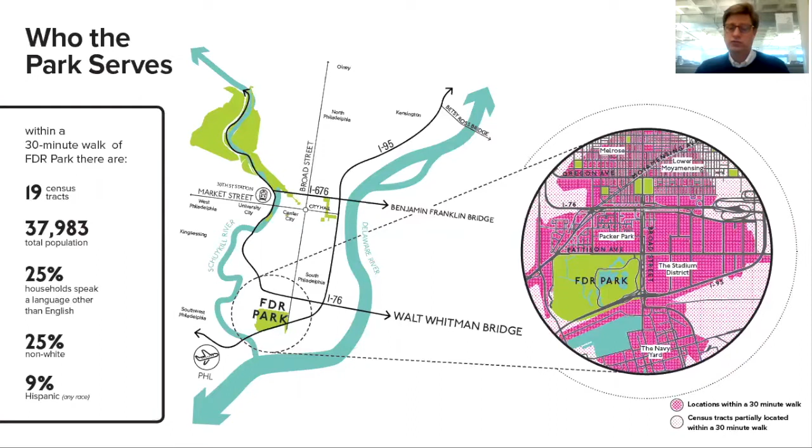Until the turn of the 20th century, these tidal marshes were largely undeveloped. Hollander Creek and Shedbrook Creek bisected the site and flowed into the back channel of the Delaware River, now the Naval Reserve Basin. It took vast quantities of fill generated by the construction of the Broad Street subway lines, and the 150th anniversary of the signing of the Declaration of Independence, to spur city leaders to hire the Olmsted brothers, Frederick Law Olmsted's sons, to create a formal plan for League Island Park in 1914.

The brothers' plan carefully separated the park from the city by depressing the network of lakes, carriage paths, and greenswards into a bowl, bisected by the extension of Broad Street. By 1926, the portion of the park east of Broad Street was absorbed into Municipal Stadium, which has grown into the Stadium District today.

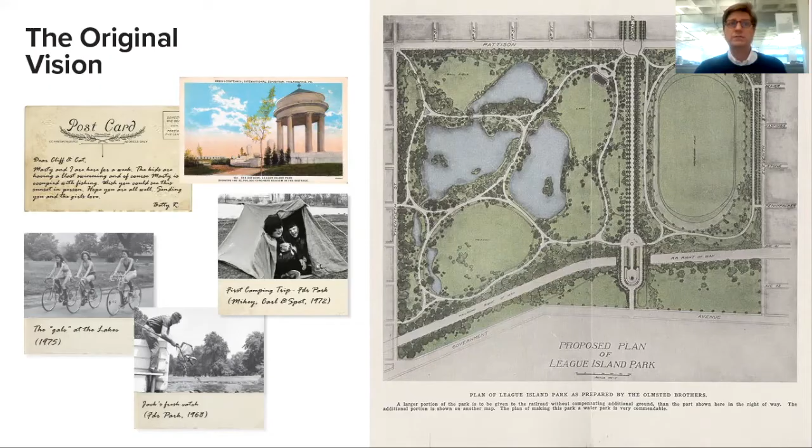The next significant change to the park came in the 1940s, when 180 acres were added to the west, creating a municipal golf course. This investment reflected the recreational priorities of the city leadership at that time. In the 1960s, the southern portion of the park was lost to the construction of Interstate I-95.

The practice of making ad hoc changes to the park has only increased. In the 1970s, the site received fill from the construction of wastewater treatment plants. These shifting boundaries are evidence of the way FDR Park is viewed less as a network of systems and a platform for recreation, and more as a green void on the city's map, ready to absorb development schemes, infrastructure projects, or pet projects of well-connected individuals.

Happily, many of the projects that have come to fruition at FDR Park were driven and led by a community of users. The famous skate park was built by hand in the 1990s. One of the region's best Asian markets draws visitors from New York to Maryland on summer Sundays. Ensuring that the park holds space for immigrants and Black communities, along with generations of Philadelphians who know this park from tailgating at football games, needed to be a priority of the master planning process.

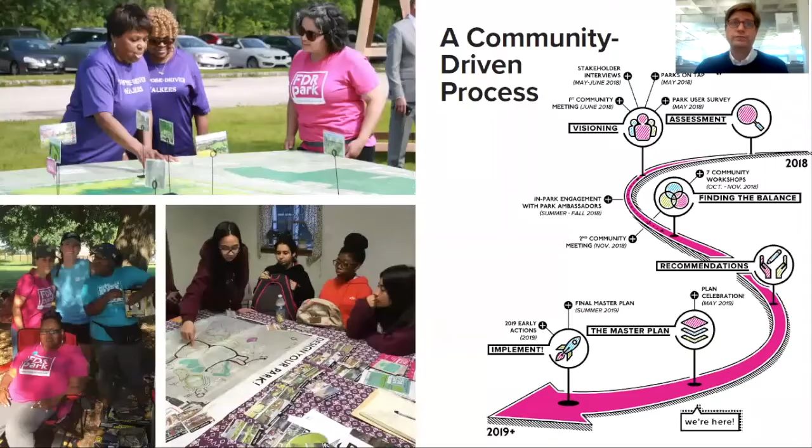The boundaries of FDR Park have continually shifted to reflect the political priorities of the moment. Our planning process needed to firmly center residents in the conversation about the park's future. During the year-long planning process, the project team engaged over 3,000 community members and stakeholders, with FDR Park being one of the most heavily used parks in Philadelphia.

The master plan process was structured to ensure that all park users and communities were invited and had the chance to weigh in on the future of the park. Yet, in order to deliver a vision for the park that has a viable pathway to implementation, the planning effort must leverage the reality that FDR Park sits at the confluence of major initiatives affecting the city's future. It was essential to be deeply engaged with the leaders of these initiatives beyond the Parks and Recreation Department.

For example, the Pennsylvania Department of Transportation was critical to understanding how the future reconstruction of I-95 can repair damages from the 1960s, such as stormwater that greatly impacts the park today. The Philadelphia Water Department's Green City Clean Water program points towards in-park projects that may help meet Philadelphia's consent decree while improving water quality in the park. The plan needed to have a strong constituency of support across all agencies.

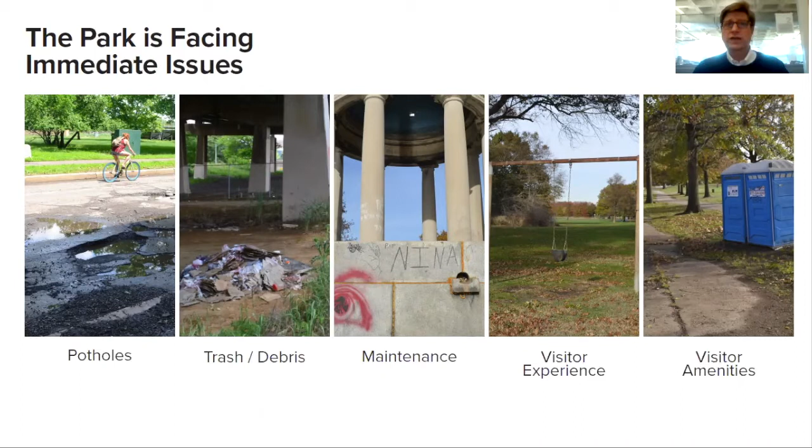So people come for one activity and then leave when that activity is over. There's not a lot of cross usage between the different users, although there are a lot of diverse users and diverse uses in the park. The park has not had full-time dedicated maintenance staff, which you can imagine is quite a challenge for a park of 348 acres in size, until they hired that park manager in 2019.

Some of the long-term challenges that affect the park—certainly water quality is a key one, and I'll talk about the hydrology of the park in a minute. The water features, including Edgewood Lake, the large iconic water feature seen in many photos, were originally designed as a shallow concrete-lined pool with areas for swimming. Those water bodies are now full of sediment, largely related to the amount of untreated storm water coming into the park, and even more shallow and subject to algae blooms.

We have areas of flooding, especially in areas of high use, like the park's only playground near Meadow Lake, and some of the low-lying athletic fields we have in the park right now. The golf course has historically had flooding problems since its construction in the 1940s. There's flooding near the baseball fields as well. So water is a critical component of the future of the park.

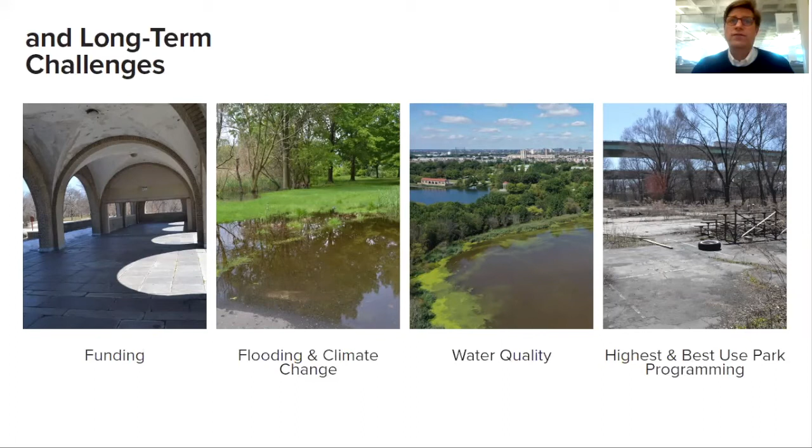FDR Park is very much a park built on and around water, so understanding the park's hydrology is critical in order to achieve an effective planning process. The park was originally tidal marshes that were filled in at the beginning of colonial times, but then continued through the 1900s with the construction of the park and eventually the golf course.

You can see on the left the original Shedbrook Creek running through the park and down through a sluice gate and ultimately out through a culvert that goes underneath I-95 through Hollander Creek culvert and through a tide gate into the naval basin, which ultimately connects to the Delaware River.

On the right, when the park was designed, several lakes were created from the original Hollander Creek, including the Edgewood Lake that I mentioned a minute ago and the Meadow Lake, as well as the Pattison Lagoon to the north. They come together and exit through that same tide gate. So the whole park really kind of comes together in the shape of a Y, and all that storm drainage exits out through the tide gate.

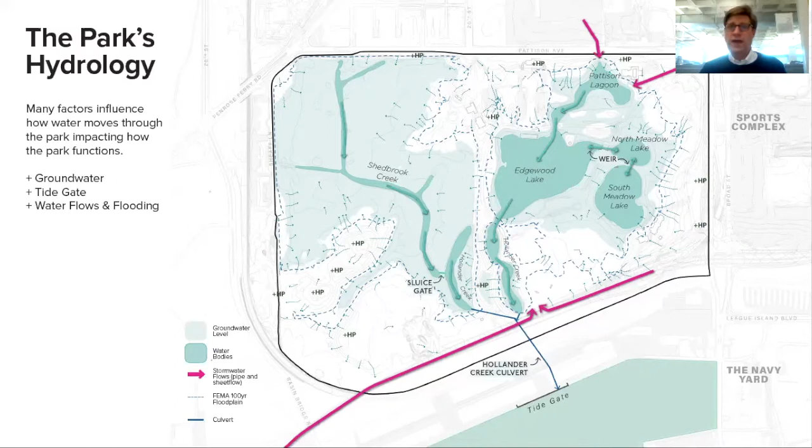But here's where it gets really complicated, because much of the park is actually located below sea level, as we can see on the next slide. So why does this park flood? Well, when it rains and the park receives a lot of runoff from upstream areas, as well as I-95, all that runoff comes into the ponds and streams and the creeks that I just mentioned, but the park itself is depressed and lower than the water level at high tide.

To further complicate things, the tide gate is not functioning well, and it doesn't close well because a lot of trash and sediment is blocking the flap gate. And so there's also issues of water coming in the other direction from the naval basin and the river into the culvert and backing up into the park. So this entire system is in need of repair. We also know that shallow groundwater in the park is connected to and influenced by the river, so that even without the tidal influence, we can get flooding just from the groundwater as well.

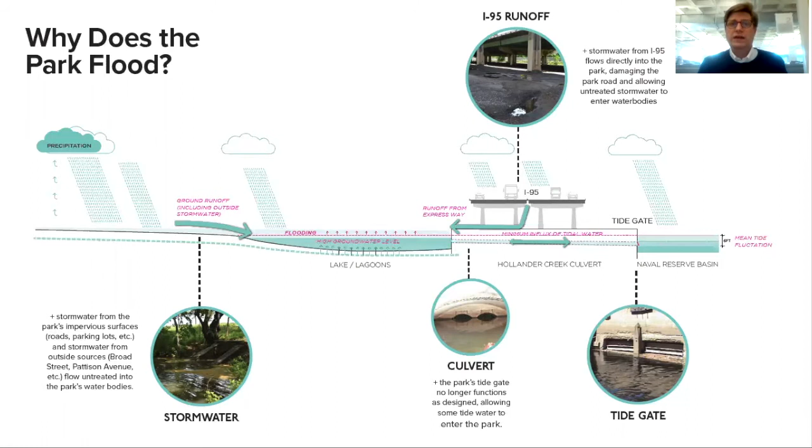As you can imagine, climate change only increases the water challenges the park faces. One of the things worth pointing out is some of the unintended consequences the park will face with climate change. As an example, in New York City, which is only about 100 miles north of Philadelphia, after Hurricane Sandy, Central Park lost over 1,000 trees due to the impacts of salt spray.

We know we will have higher water levels, as much as 2 feet in FDR by 2050 and maybe 4 feet by the end of the century, as well as greater storm surges. So the challenges of getting water out through the tide gate only increase. With the increased CO2 levels, we know that this will help the forest and the vegetation grow, but it'll also increase the growth of invasive species, which already plague the park.

However, despite all these challenges, both current and future, there are also incredible opportunities and resources in the park, including the existing ecology. You can see from this figure the diversity of species you might encounter on a hike in the park, and some of the habitat that we're actually trying to design in the park to increase the amount of species that are currently there.

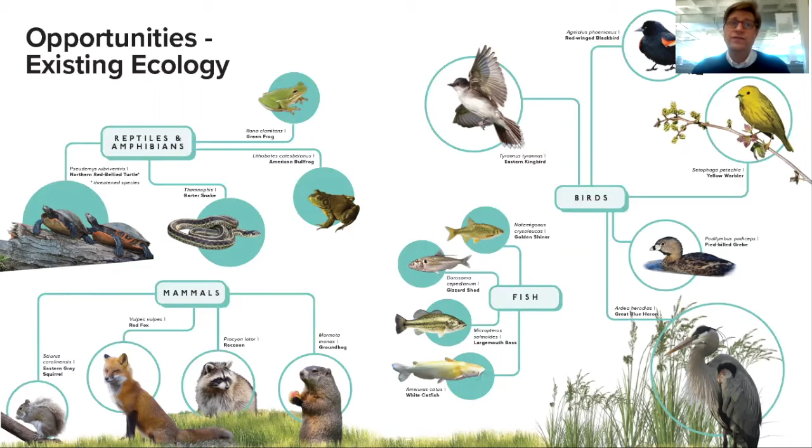FDR Park is an important bird area, as I mentioned at the beginning, as designated by the Audubon Society, with over 195 different species of birds that have been observed either living or migrating through the park. There is a variety of plants and animals, including 2 endangered species of plants and endangered animals such as the red-bellied turtle. It's an important place for wildlife observation, for fishing, for walking, and being in nature.

So when we were developing goals for the master plan, we knew that the park users would come to know FDR Park as Philadelphia's centerpiece of recreation, art, ecology, and resilient design. In order to achieve this vision, the master plan focused on 3 goals: reclaim the vision, restore the function, and renew the impact of the park. The master plan reclaims the original vision of the park for a modern audience by working within the original framework and design intent of the Olmsted brothers.

To restore the function of the park, the master plan leverages nature-based solutions such that the entire park can fulfill its promise as a critical piece of civic, public health, and ecological infrastructure. The master plan is driven by the knowledge that strategic investments in our civic assets can connect people of all backgrounds, cultivate trust, and counter the trends of social and economic fragmentation in cities and neighborhoods.

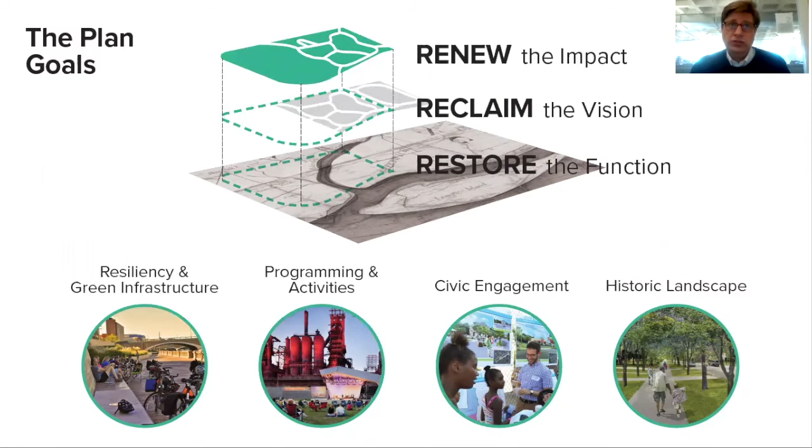To achieve these goals, the design team embarked on an urban ecological methodology called creative fitting. And simply stated, this methodology matches users' needs with environmental opportunities. Now, the measure of a successful creative approach is fitness, which is measured by the health and resiliency of the project's network of social, environmental, and economic benefits, which I'll discuss in just a few minutes.

The FDR Park Master Plan brings nature, water, and human activity into balance in one unified system. Another way to define this is how we can find the balance between all the different competing interests in the park. Every square inch of the park is precious, and the list of programming needs determined through the community engagement process with the priorities that I mentioned before exceeded the amount of park space we had to work with. So we had to be creative in fitting together all the park programming so that they could all be mutually beneficial.

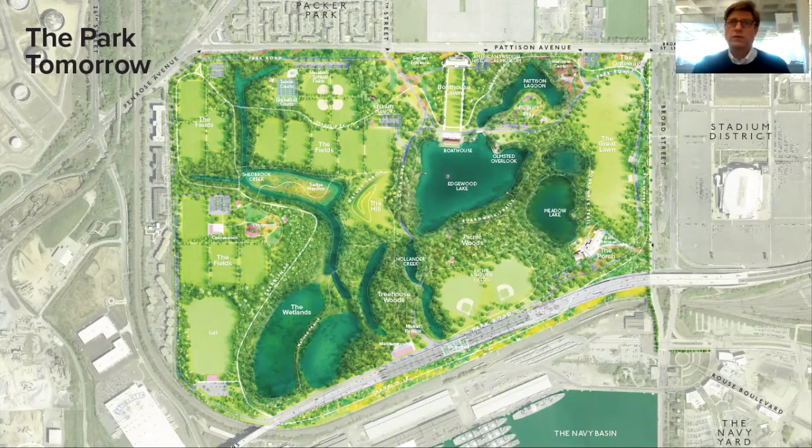Now, the master plan vision reflects a network of watercourses enclosed by swaths of reforestation, encircled by a network of trail systems and tree-lined parkways, framed by fields of active recreation. Playgrounds, restrooms, picnic pavilions, overlooks, and concessions are systematically distributed throughout the park to enhance the visitor experience. Enhanced gateways, expanded event lawns, and increased programming activate the fields at the park's edge, while restored lakes, creeks, wetlands, and riparian reforestation provide an immersive nature experience with enhanced habitat connectivity at the park's ecological core, which you can see in this diagram here in the green, the middle portion of the park.

So this ecological core contains some of the most iconic elements of the park, which are also the areas that are most susceptible to flood risk. The master plan recognizes this risk by increasing the park's capacity to manage water while simultaneously providing opportunities for the park users to connect with nature. Expanding the natural systems at the heart of the park improves the ecosystem services that the park offers to all the park users.

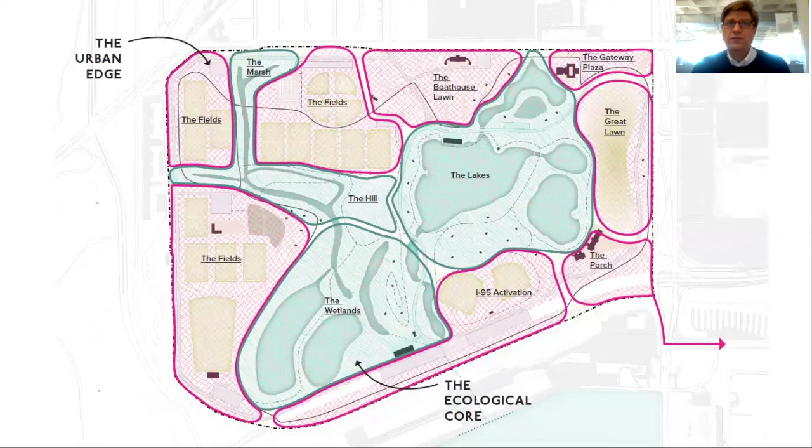And sort of pink or magenta around the outside is what we call the urban edge, and that encircles the ecological core and frames the perimeter of the park, providing an attractive and welcoming interface with adjacent communities. The urban edge contains a network of green stormwater infrastructure designed to manage runoff from the surrounding urban areas. Natural filtration systems ensure that the park can accept stormwater from the roadways without degrading the water quality in the park's lakes or impacting the park infrastructure.

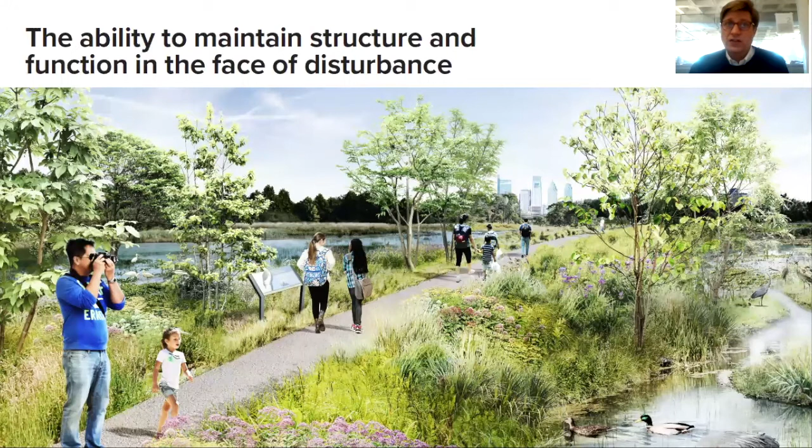At a large scale, resiliency is defined by three basic principles that many of you may already be familiar with. But the first principle is the ability to maintain structure and function in the face of disturbance. So we accomplish that in many ways at FDR Park. First, the master plan will rebuild the tide gate to improve the water flow in the park and allow the park to drain faster after flood events. Secondly, the plan will manage unfiltered stormwater and manage all impervious surfaces, both existing and proposed, within the park with best management practices that exceed the Philadelphia Water Department's minimal requirements, which serve as a national model for stormwater management and resilient design.

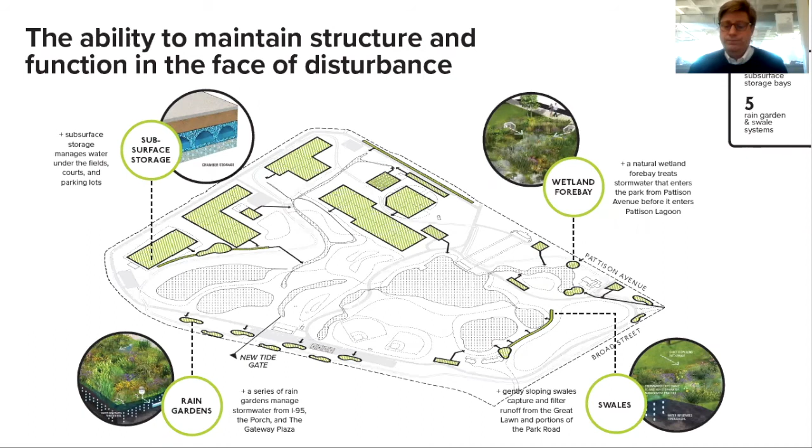Thirdly, the plan will balance the cut and fill on site to allow certain parts of the park to flood and raise critical programming out of the floodplain. For instance, we can't have the recreation fields on the perimeter be high and dry if we don't do some of the wetland projects, widen Shedbrook Creek and create a sedge meadow to allow for additional stormwater storage while maximizing habitat and creating other recreational opportunities.

So to dig a little deeper into this, the wetland project, which is just sort of to the left of this rendering over here, is an example of how the master plan really tried to find win-win scenarios while doing this creative fitting process and trying to find a balance between the different themes of water, nature, and activities. So the nearby Philadelphia airport, which is less than a mile away, needs to expand their runways and was looking for a wetland mitigation site that we were able to accommodate in our master plan.

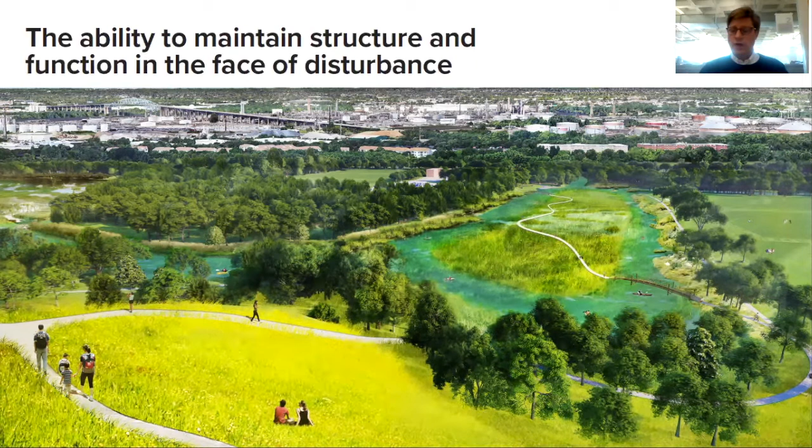So the 45-acre proposed wetland expands our ecological core, provides a more natural, immersive experience for park users, and we were able to reuse the 330,000 cubic yards of cut where we had that fill from the 1970s that I mentioned, which is relatively clean fill. And we could place that along the urban edge to help elevate our playing fields and keep them out of the floodplain.

Now, the second principle of resiliency is the ability to be self-sustaining. So first, the master plan provides opportunities for the park to generate its own revenue to help offset operations and maintenance costs, which is really the first park in Philadelphia to do so. So this is a really big idea.

which is a new southern gateway to the park that repurposes the bathhouses for a potential restaurant overlooking the lake and a community-centered event space that anchors the Great Lawn, which is just to the north of these bathhouses.

The master plan detailed a 10-year pro forma with a goal of minimizing the amount of tax subsidy required to operate the park. This is also really important because this would allow the Department of Parks and Rec to allocate funds to neighborhood parks in underserved communities that may not have the ability to create revenue or attract philanthropic investment of their own. So if they don't have to invest in FDR, they can save that money and invest in other areas that really need help as well.

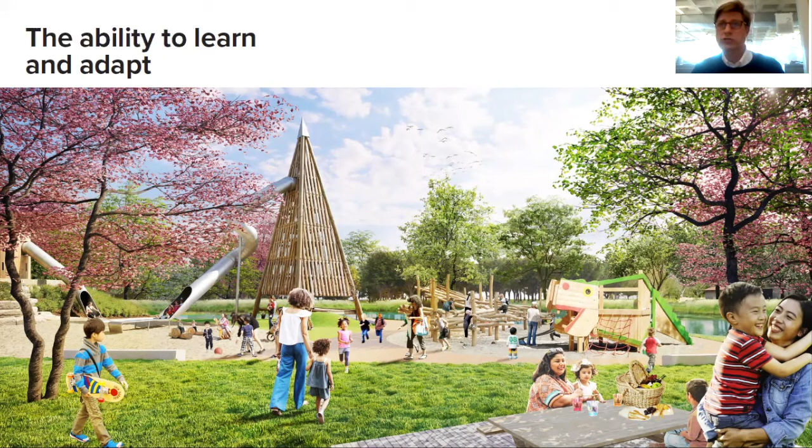Lastly, the plan encourages public health, both physical and mental, and we've certainly seen that during this year with COVID, and combats nature deficit disorder through recreational opportunities, including a network of multi-use and nature trails, multi-purpose fields and courts, and open spaces, as well as immersive natural areas for respite and relaxation.

Parks improve people's lives and bring communities closer together. They're agents of social, environmental, and economic transformations. The revitalization of FDR Park is an important statement about the value of parks in sensitive environments and their ability to provide value beyond everyday programming and activities.

The master plan uses an inclusive range of consideration, environmental, economic, and social, to maximize the benefits for the park and to measure the park's health and resiliency, as I mentioned, as part of this creative fitting process. So this process identified opportunities so that the balance could be found between competing park uses, such that the benefits would create the win-win scenarios for short and long-term life of the park that I mentioned with the wetland.